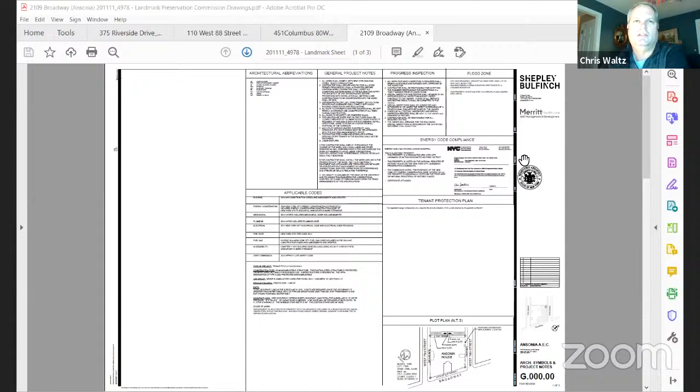The only modification we're making to the exterior of the building is the entrance to our suite. It's an existing door, a French door. It probably shows up on the next slide - you can see it in the bottom middle. That's the existing door.

The problem with our door for the new project is that it doesn't meet accessibility requirements. The leaves are currently about 31.5 inches, so when open there's just under 30 inches of clear space. We need 32 inches clear to meet accessibility requirements.

So we're proposing to remove the existing doors and replace them. They're wood-framed French doors with single pane glazing, which I'm sure you're all familiar with. We're proposing to replace these with Hope's windows and doors - you're probably familiar with them from Jamestown, New York. They're pretty much the go-to for historic preservation for windows and doors, and they're steel framed with insulated, double pane glass.

We're proposing essentially the same orientation - you can see it in the middle on the right. If you zoom in, you can see one of the leaves is a little larger than the other, about 1 inch larger, so that when open we have 32 inches clear. We also needed to eliminate one row of panes in order to put in the horizontal crash bars for the interior, but otherwise we've tried to maintain the look that's there as best we could.

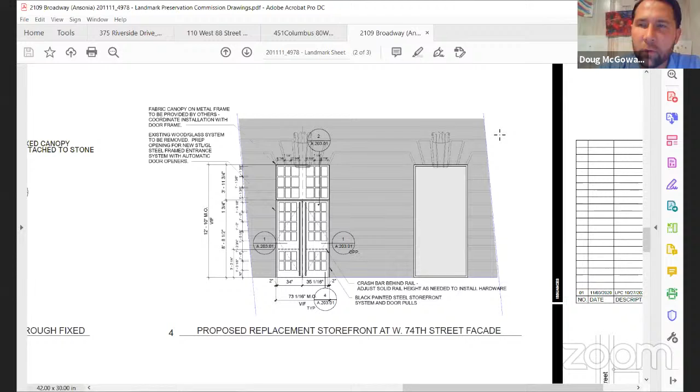Question on the door - is there also a proposal to put a banister or handrail down the center of that door? Yes, it shows up here as well - those are vertical poles in the center of the door. That's a door pull, right, not a handrail? Right, that's a pull. And the inside has a crash bar, and we also have an automatic operator being put in the floor to operate that.

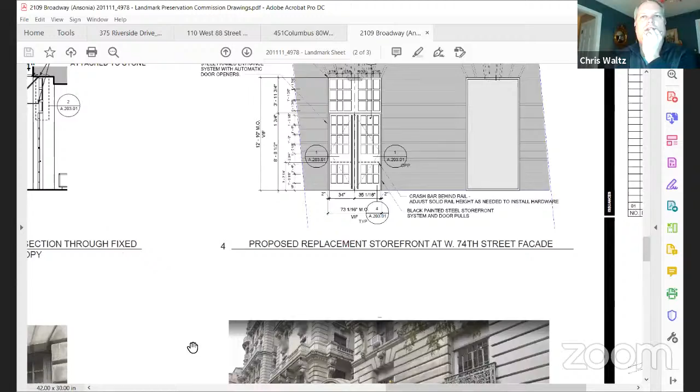If I may, it looks like here on the transom you've got some sort of divider - it's not a complete replication of what was there before. There is a central panel there, basically a large mullion. If you pull over to the left a little, you can see the center is a little wider due to the way it's framed in the transom. Ours is a little wider, and we're trying to line up the glazing from the windows in the transom to the windows in the doors. Because the doors are slightly offset, we felt this arrangement worked best, and we end up with that larger mullion in the middle.

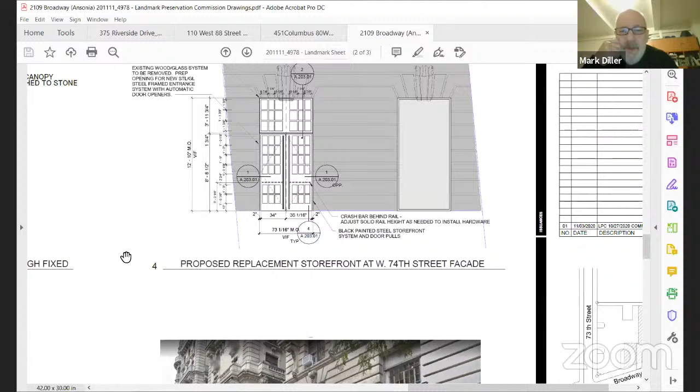Is the mullion in the middle of the transom the same width as the interior frame for each door? Because it looks like this element and the width of this element are the same - is that what you're going for? They don't line up directly. Of course not. So we tried to approximate it, and I'm not sure, Mark, if that was a construction issue from the manufacturer or a design issue.

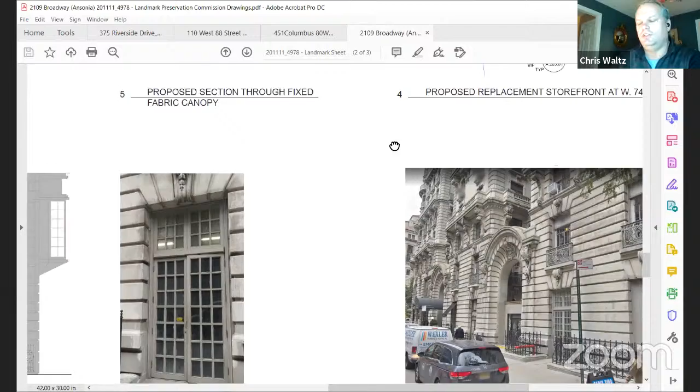In working through the drawings with Hope's, they indicated they need a certain width for the structural integrity of the frame. So if I understand correctly, there's about an inch, give or take a sixteenth, difference in width between the two panels of the doors. Is this dead center, or does it follow the line of where these door pulls line up?

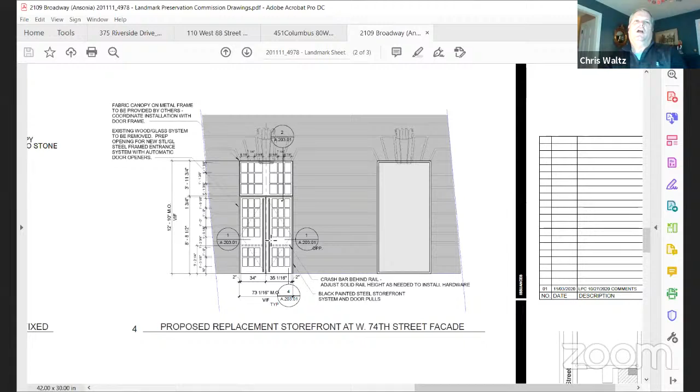Mark, can you comment on that? One of the doors is slightly larger than the other, and the width of the upper mullion is made a little wider for both structural reasons and to capture that discrepancy in the width of the lower two doors. It looks like this is dead center, and I'm wondering whether that'll look odd with the transom divided evenly in half above, but the doors below offset by a couple inches. I don't know whether that reads visually - it's hard to tell from the drawing. The way it's dimensioned, the top is equal and the bottom is offset. Our feeling was the offset is only a hair over an inch, and with everything going on there - the divided lights, the poles, and the canopy - it'll be negligible.

From a front view looking at it straight on, it's one thing, but you really never see it dead straight on all the time - you're seeing it walking up from either side. So we think that'll be a wash from a visual standpoint.

And will the color be the same? I have a question - did you do that because you're not making changes to the upper portion, or is the upper portion being changed like the doors? The upper portion is being changed to the same material and the same manufacturer as the doors.

I think the reasoning behind it was just to try to keep it to reflect the symmetry in the space, and trying to sort of hide it in the doors, because it's going to get lost in the thickness of that center mullion. That was the thought process.

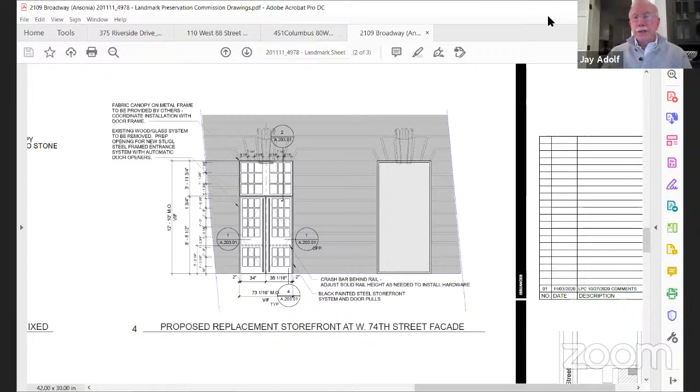I have a question, two questions actually. The other entrance doors on the other facades, are they still wooden doors?

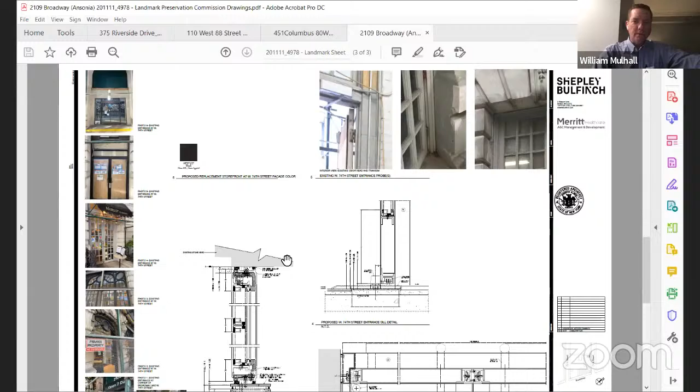We actually submitted some pictures of other ones, I'm not sure if they got into this submission. Can you zoom out? Was there one more page? I believe the only ones remaining that are wood are the actual entrance into the Ansonia residential component. I think the dry cleaners next door is metal, as well as the patisserie. No, I think that one's wood. Yeah, the patisserie is wood.

On the left side, those are some examples of the adjacent storefronts that have been added in. So we've got the very traditional storefront, the first two there. That's the existing, which matches what we have now. And that one's still wood. Yes, it is. I actually go there. That it definitely is.

So what's the rationale behind not replacing the current wood door with a wood door that meets the ADA specification? I think a lot of it is more the practical side, durability, security, strength, those types of things. These doors are extremely tall, and we feel that over time there's going to be a lot of traffic, so we felt steel would be a better functional solution to this.

You mentioned the automatic door opener, is that on the inside? It's recessed into the floor slab, so you won't see it. It'll look just like a threshold. I see, okay.

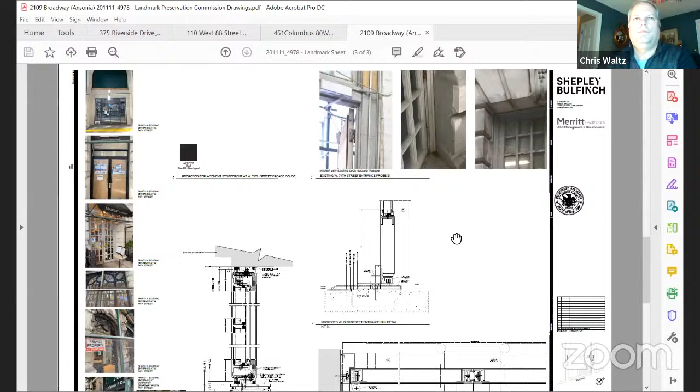And thank you for having that. I thought that sheet wasn't in there for some reason. Thank yourself, because I got it from you. I knew we had it. I thought we sent you a different version. So were there any more questions?

If you have more questions on the doors themselves, you can see in this image on the right, near that image, the canopy we're proposing. The intention is to match as closely as possible the adjacent one at the patisserie for color, size, and location.

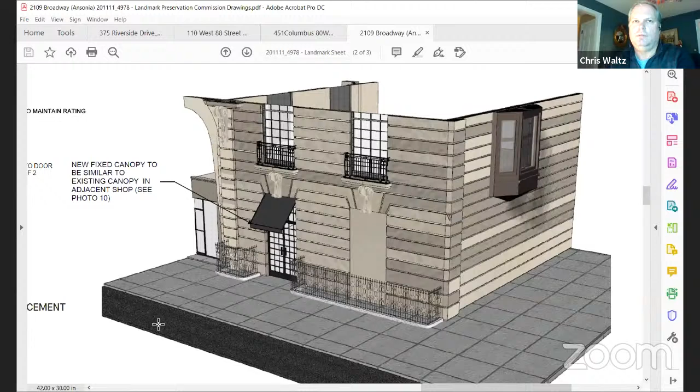Material? It's a fabric material. Both. The patisserie is also fabric. Yes, I believe the patisserie is fabric. I don't believe we specified this.

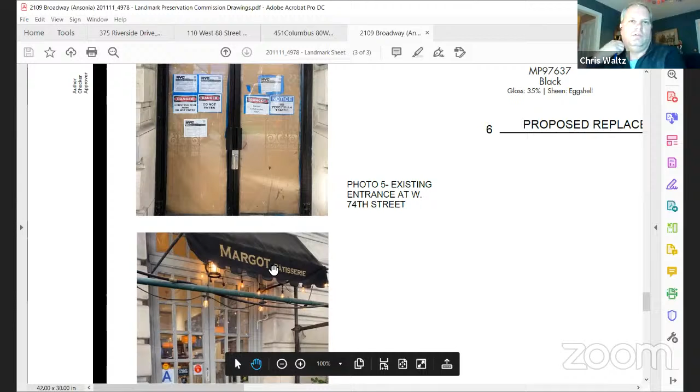Okay, will there be writing on it? Very similar to what is on the one at the patisserie. Yep.

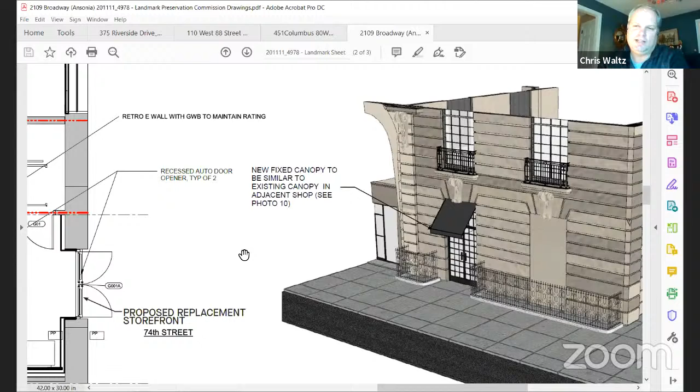Can you explain something about the different colors? There's the white and then there's a black door as well? Well, the white is really, so where the canopy is, that's our door, and the white is really representing the glass. It's just the way that it rendered in this image. No, I don't mean this.

I mean in the earlier one, the other storefront that is not being changed. Oh, at the patisserie. Yeah, so they have kind of a grayish tone to theirs. We have black, and the black was intended really to match some of the interior elements as well as the fencing running around the outside. Oh, so your door will be black? It will be black.

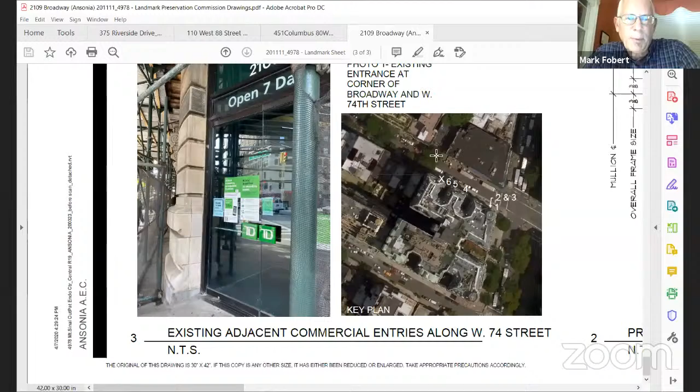Is that scrollable? If you scroll out, you can see there are other storefronts - that one in photo number 3 is also black. And if you scroll down, there's another one that's also black. Most of the storefronts existing there now are black.

The cafe is the only one with gray. Yeah, but the gray is the original, isn't it? It looks like the windows above are greenish. Because I would completely rule out the Philistines who designed this one, for example. They don't get a vote.

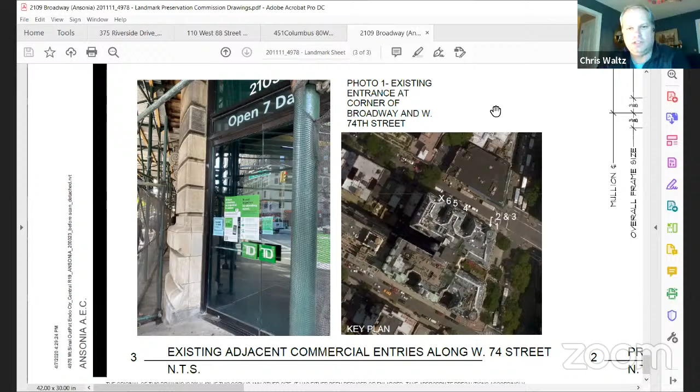I think that's fair - sorry if that's you guys, by the way, but I'm guessing it's not. No, probably not. Is the existing black? No, the existing is gray.

I don't remember what the windows above are, to be honest with you. Yeah, it's exactly like that one right there, the existing one. Got it, right. All right, I'm going to stop share for a second.

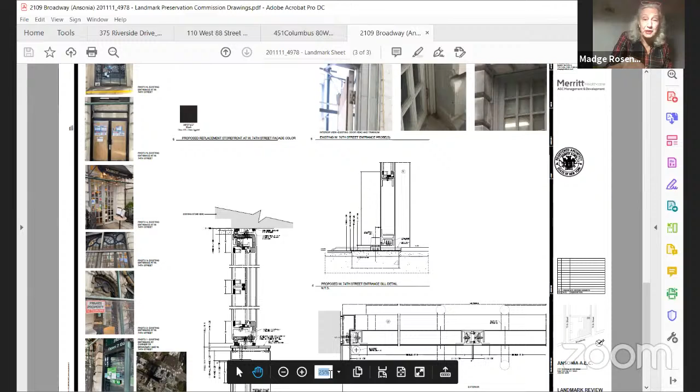They're in terrible condition, and I'm wondering if any of those doors are part of your project. No, they're not. It's just this one entrance that goes into a little small waiting area about 500 square feet, and you take an elevator down 2 floors, and that's where the space is. So this is the only piece.

Is there anything to preclude the color similar to the Cafe Margot, so that they don't look so metal? They might look a little less different and less metallic if they were black.

That was a choice we made. I suppose that's an option we could consider. I think there's an availability in that color, if that's what you're asking. Yes, thank you.

I did a quick look for the existing color of the windows above, and I saw this picture, which seems to suggest that the windows above are a darker color. Yes, it does. I don't know if that's useful, but quite beautiful. Okay, we'll put the other screen back up again.

Can you remind us the reasoning behind increasing the size of each door by a half inch, or decreasing the glass panels? The existing doors are equal, but that's always a problem with French doors. They're the same size, but neither meets accessibility requirements, so in order to maintain the look of French doors, we had to make one a little bit larger, by about 1 1/16 inches, just over an inch, to make it the correct accessible width. Another option would have been a single door in some kind of infill, or a single door 5 feet wide spanning the whole thing, or sliders. But we felt this was the most authentic and paid the most respect to the existing building.

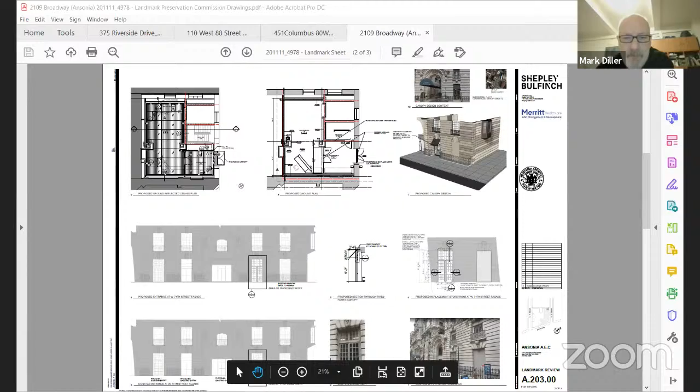I don't know if it's of use, so I'll make this quick. Looking at this slide, I'll enlarge it a little bit. Just confirm for me that I'm reading this correctly, that this is the existing facade. Over here is the TD Bank. This is Cafe Margot, this is the dry cleaner. This is actually a recess into an areaway that has a built-out entrance with a very modern 1970s aluminum door frame. And then this is your space. Do I have that all correct?

I believe that's right. This is the dry cleaner here. And this is that blank metal thing. Yeah, that's correct, it's an infill. Which unfortunately is right on the same plane as the stone around it.

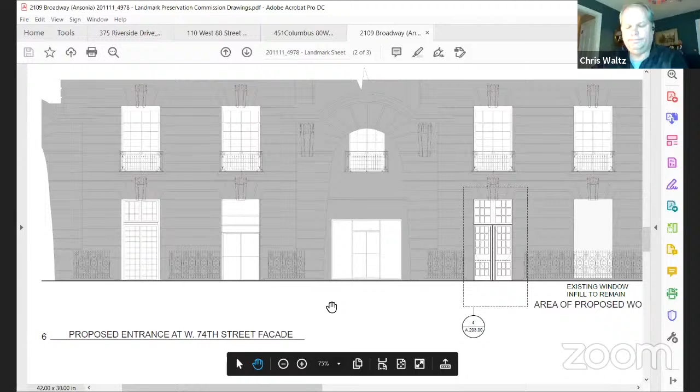Any other comments, thoughts, questions? Yeah, I have a comment. I kind of feel about this the way I felt about the vault lights at the Apthorpe, but given the fact that it's going to be changed, all things being equal, without a compelling reason such as impossibility, I would prefer, and I think it's appropriate, to replace these doors with wooden doors in a color similar to the patisserie. To that gray? Yeah, that's my opinion. No, I can't agree with that. I think because there's one bad apple in there, the other one shouldn't join it. I think to change the patisserie is more the goal, if possible, but that's not before us. So I would go with the doors as they're being proposed, and hope.

Why is the patisserie a bad apple? Well, the patisserie has got this very whitish color for the doors and windows, and all the other window frames and door frames are black. Is the patisserie the original door? Is that not right? I don't know that we know that one way or the other. It's certainly been there a long time, but whether it's original, no one has opined.

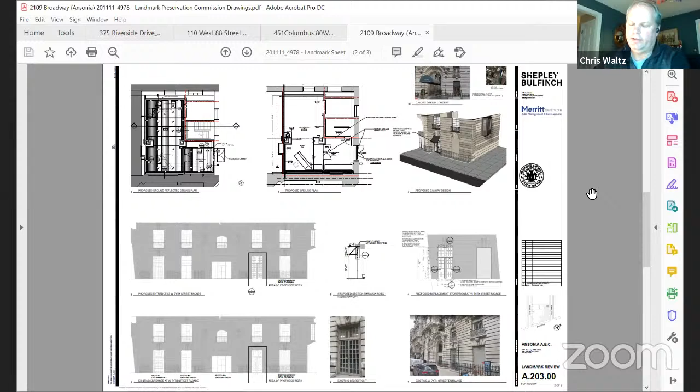If I could ask a question of the architects, would a change to wood from metal have an effect on the functionality of the doors vis-a-vis their ADA compliance, or is that just a choice that can be made one way or the other? I think we'd have to look into that, because we have the auto operator on there for people who need to use it, and I don't know if a wood door would have the rigidity needed for the auto operator to function. I'd also have concerns for the owner about longevity, replacement, and upkeep, because with wood you'd be painting it extremely often, much more so than metal.

And also, we're required to meet the energy code. The steel doors, the storefront, is thermally broken, so it's made to meet the current energy codes as well, with the insulated glasses.

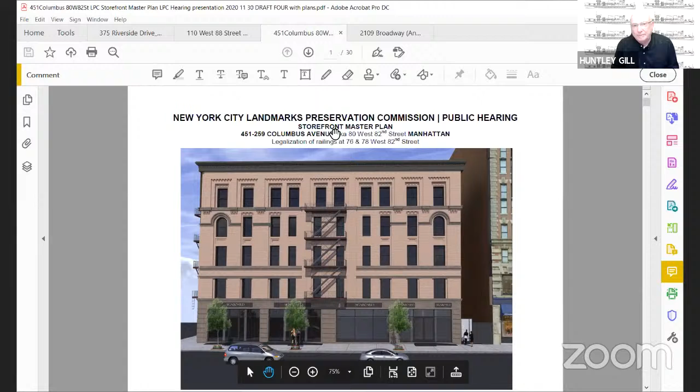This is a building between 81st and 82nd Street. You see the location here, it wraps around the corner. It's 3 tenement houses. One is the north half of the block on Columbus between 81st and 82nd. The other 2 houses march down West 82nd Street. So we can go to the next one.

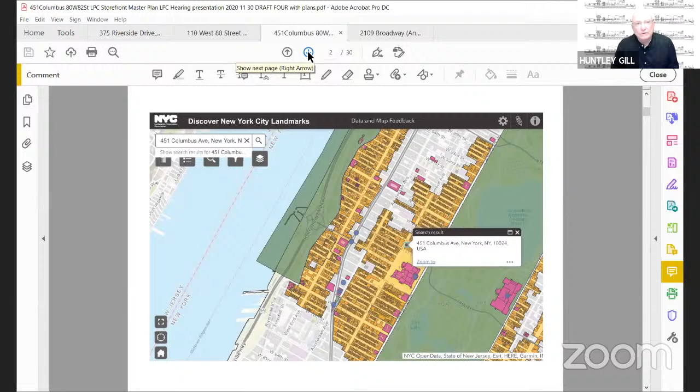That's a separate staff approval of brownstone restoration. Unfortunately, at this point the client is probably going to paint it, which I don't like, but I'm not in control of that. There are also 2 sets of railings on the stoops at 78 and 76.

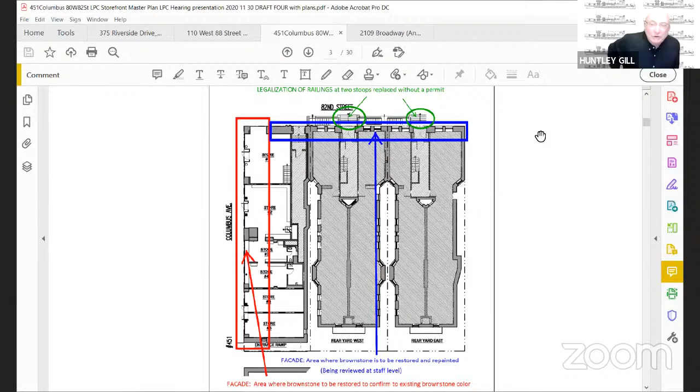We'll look at pictures of those. They were replaced without a permit, and that happened because they were very low. My client tells me he didn't know about this, didn't even notice it. They were very low, perhaps 18 inches, and one night somebody, probably in his cups, tumbled into the area way below. So they were quickly replaced. We'll take a look at those. We can go to the next.

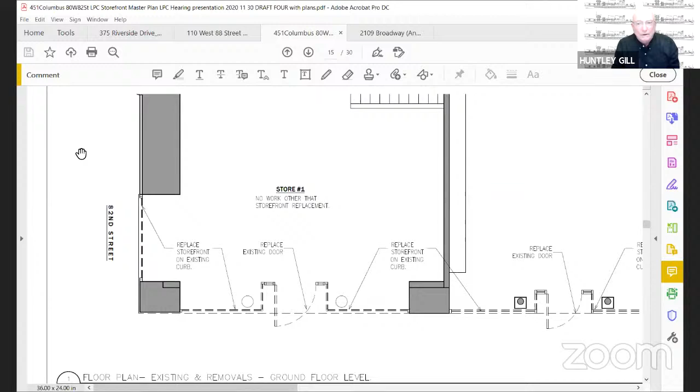You'll have to zoom out here. This is the demolition. You can see how the existing storefronts are set right up to the front plane of the building. If you scroll down, they're being inset back to their original location, which is slightly inset. All of the doors are in-swings. The spaces are luckily small enough that we can do that, so you don't have to have any insets for the doors. They can all be flush, which is much preferred in retail.

We're providing here in store number 3, which is actually part of the linen store, for the fact that if it's ever turned into 2 stores, we could put a door back in there. We won't be in the meantime, although he's struggling, so who knows what's going to happen with that.

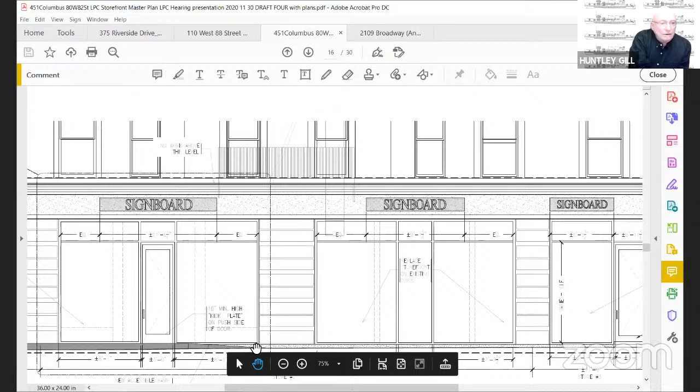Could you scroll down just a little bit? I want to see if there's any details on the ramps. Do you have this up on your screen? Would it be easier if I just let you put it up yourself? If you'd prefer, sure, I can do that. Let's do that because this isn't working so great.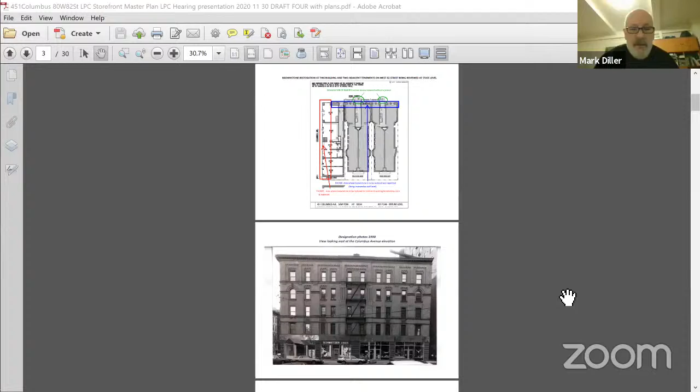So hold on one second, you should now have the ability to share your screen. Sorry. Does this do it for you? Right now I'm not seeing your screen, but maybe it's just taking a second. If not, I'll go back and continue where I was. It's up on my screen, so I don't know what. There should be a green button at the bottom of your screen that says Share Screen. Hold on one second. I'm seeing, oh here we are. There we go. Great, okay, now you've got the controls. Sorry, this is taking so long.

You're doing great. You can see in the plans here these are the ramps, really without railings. They're ramps and steps, so it's a minimal intervention. We made them as small as we can. We hope that's a temporary thing, and we don't know if any of these stores will choose to put them in, but we wanted to put it in the application anyway.

Here again is the elevation. You can see that what we're planning is to put this brownstone element that continues, replicating from 82nd Street, this small cornice, continuing all the way across. Then we'd put aluminum signboards in the space above each store. Retailers love signs — sometimes I'm not sure why they think they need them so much — but the signboards would match the color of the cornice above.

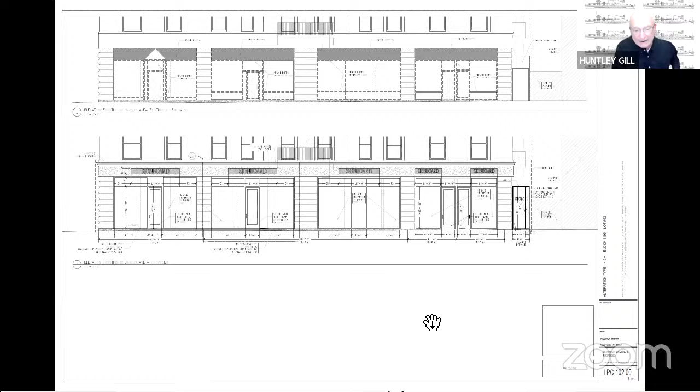This is turning the corner. You can see we'd be replacing this one light here on 82nd Street. Then this is where the line would go between the restoration of the brownstone as brownstone, and, at least right now, brownstone restored as paint. If its occupancy rate goes up, we might talk him into changing that, but that's not going to happen soon anyway.

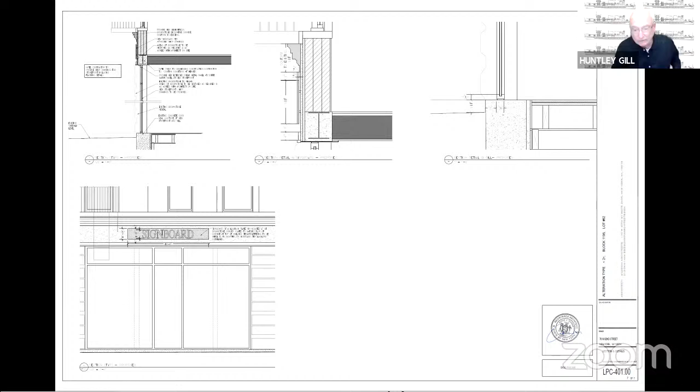Here are a couple of details. You can see the storefront being inset so we can get a view of the existing. There's a nice brownstone reveal here that goes into the storefronts. As we replace the storefronts, we'll take out any gypsum board or whatever is on the inside so you could actually read that all the way through.

Here's a rendering — again, the signboards would match the color of the cornice. The storefronts are aluminum, very simple, flat black, powder coated. We'll also be replacing a rather ugly metal gate here that goes down to a rear yard where there's a storage tenant, so it's used. We'll replace that with a simple glass door that matches the existing storefront doors, in frosted glass. Another rendering — there's a signboard missing here, there'd be another matching signboard there. And you can see here the handicap ramps.

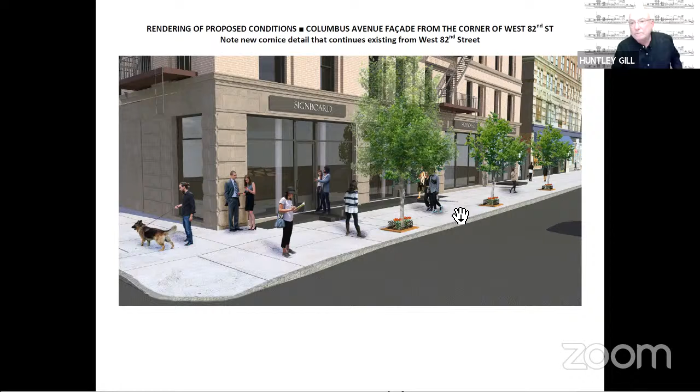Another rendering here, you can see this. It's not drawn correctly - it actually aligns here. It's drawn correctly in the drawings, but the rendering wasn't updated, so this aligns here with this mullion.

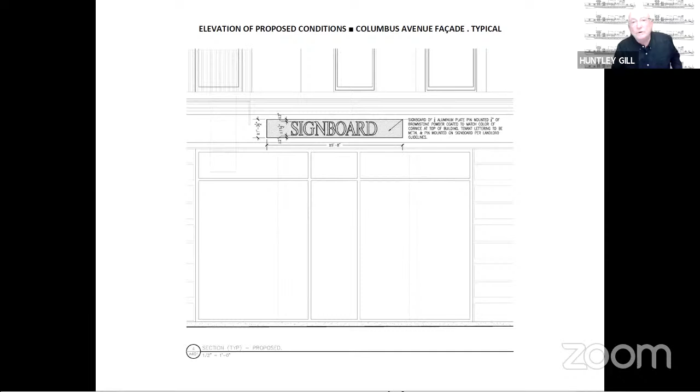A detail - this is of the center store. A few more details, you can see here's this photo here. There's that nice kind of brownstone reveal tucking back into the brick, which is what we want people to see again.

Here's some others. We're doing full height glass, which is what you need these days in retail - God knows Columbus Avenue needs everything it can get. A lot of these storefronts have been approved by the commission that are full height and with in-swing doors. These are just some examples going up and down the avenue. I'm sure you're all familiar with them.

Our philosophy is, and it has been since we advocated for the creation of the historic district on the Upper West Side strongly over the opposition of a lot of our clients - our position has always been, as at Madison Avenue, that the thing we want to preserve very carefully is the frames of these storefronts, which tend to be of historic material, but that the storefronts themselves were always relatively fungible. They were wood, they died, they were replaced, they were changed with tenants. And modern retailing really smiles upon having glass go down to the curb so you can actually see what's being sold more than any sort of storefront.

This is going on to the legalization, which is these are the darling little railings that were unfortunately replaced after a dramatic tumble, as I said earlier. And there were choices. This is what the client put in, and I sort of didn't even notice they'd been replaced. They wouldn't be my choice, but I find them rather inoffensive. The staff at Landmarks thinks they're rather inoffensive too.

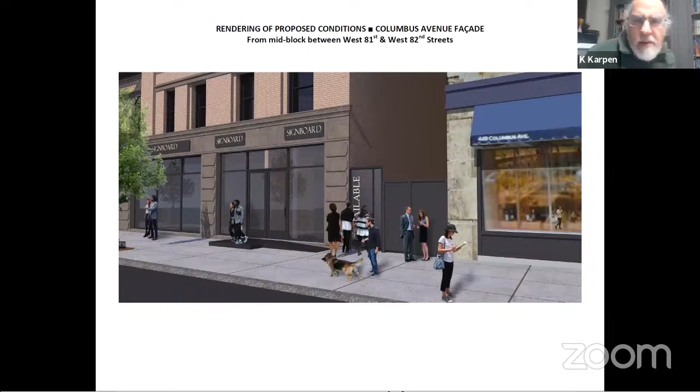So before us, for our input, is the legalization of the railings, and what other element? The legalization of the railings is the only thing that's going, other than the master plan for the storefront, going before the commission.

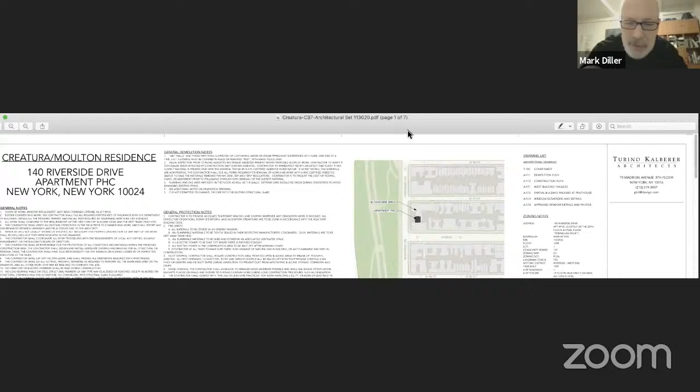Could you explain to us how to share? Sure, look at the bottom. If you move your cursor to the bottom of your screen, you should see a green button that says share screen. And then that should activate a window that'll show everything, including pictures of the grandkids, that is up on your computer. Yeah, you got it. There you go. Okay, great. Beautiful, you're all set.

So I'm just trying, how do I get to the next page when I have to go? Either try, are you on a Mac or a PC? I'm on a Mac. All right, then try the right arrow. Oh, I see, arrow. Now hold on, if I just scroll, that'll work too, right? It will, but you'll have to align each time, but go ahead. There you go. All right.

I'm really sorry everybody, I thought we were all set with this. No worries. All right, what is your name?

My name is Julie Kalberer, and my colleague here is Bill Turino. Can you spell your name for me? Kalberer, K-A-L, B as in boy, E-R.

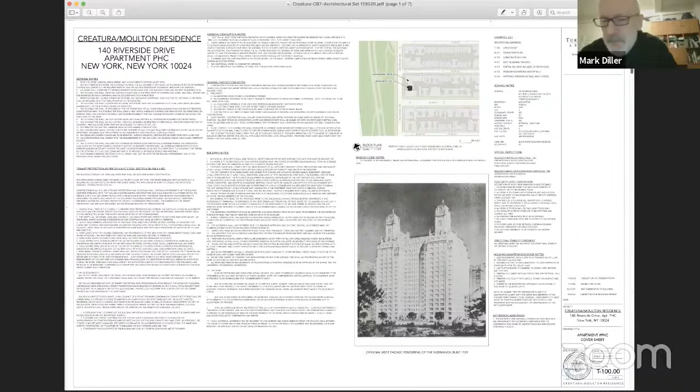Thank you. Do we need to promote Phil in order to hear? All right, well why don't you go ahead, and if you need Phil's help he'll just sit here with me. Oh, he's there in the same room? Perfect, okay, all right, I'll shut up.

All right, so showing you the first page here. This is a rendering of the building. This is the Normandy on 86th Street, between 86 and 87. It's an individual landmark, a 1939 Emery Roth building. We are doing an apartment renovation on the top floor, in the area between the two towers facing Riverside Drive. And it became clear to us, and I will go through these drawings and show you, that changes had been made on that top floor that were then captured in the window master plan of 1992 for landmarks, that actually make it look now like it's an unfinished elevation, and that we might have an opportunity to combine windows, which is obviously better for my client, but also better for the look of the building.

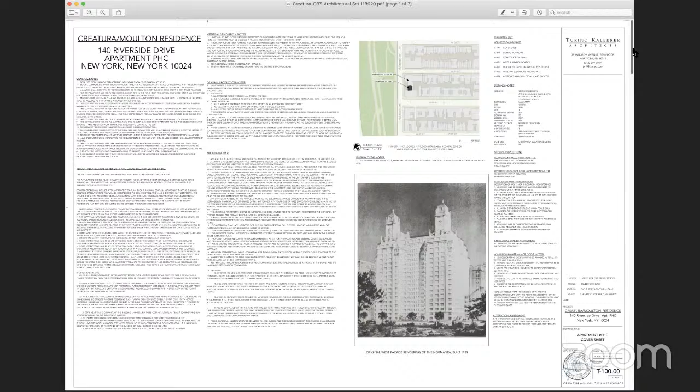So I'll take you through it here. This was the original rendering. You can see that very top floor in between the two towers is the one we're looking at. I'm going to skip through the plans and go right to this sheet here. The left-hand drawing is the existing condition, what it looks like today. If you look at that very top floor again, in between the two towers, you can see it's a mishmash of windows in terms of opening sizes. There's a combination of wide windows, very typical for the Normandy, but also smaller windows, which was typical up at this level originally.

Now, what happened was that sometime before the 1992 plan, on the far left on that upper level, the two large windows in a neighbor's apartment were combined. So what originally was a series of singular casement windows with an occasional wider window became off-balance, because you have these larger openings on the left, and our windows are the smaller ones on the right. On the next sheet, the right-hand drawing is what we are proposing, including using the master plan for the windows, so you can see at that top level what the neighbors will have to do when they make their changes.

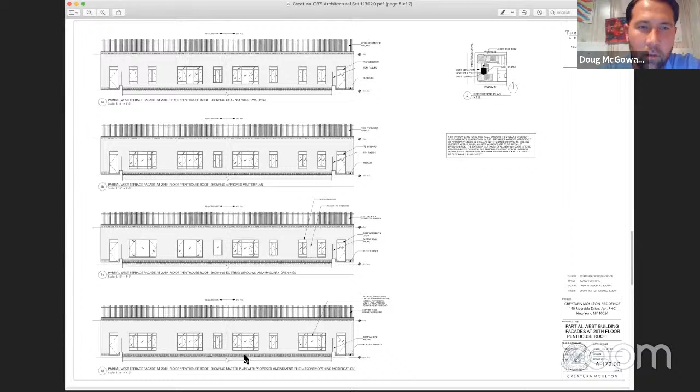You mind if I ask one quick question for clarification? Sure. We're talking about the windows at the right of the rendering. If you go all the way to the bottom, and look at the last rendering we're focused on, then move to the left, it appears the two windows all the way at the left are also changed in this rendering. Yes, the very last one shows the new opening we're proposing, but it's also showing what the master plan has planned for the left-hand ones. This would be the eventual goal, to get this whole elevation this way. Of course, that's not in our application.

Beautiful. All right. Questions from the committee or others?

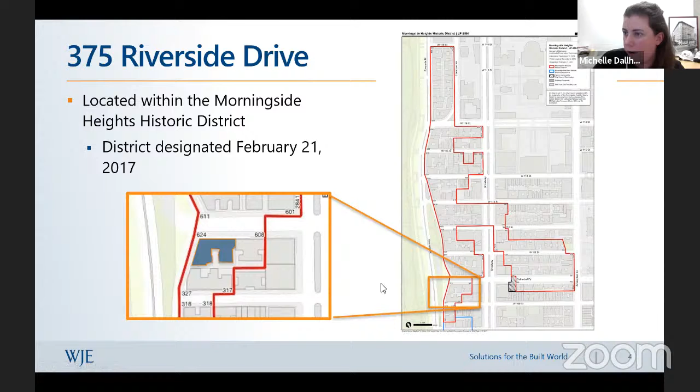Here, 110th Street. I'm sorry, just remind me, it's on the south side of 110th Street? It is on the south side, yes. Okay, that's us. Okay, yes it is. Oh yes, it's just at the edge of the community district. Yeah, I noticed that this morning. You just got us, yes. We just got you, all right.

So it is a tan brick building with some terracotta detailing. It is a Renaissance revival, but overall the facade is very subtle and very muted.

Here's the 1940s tax photo. Generally, the facade has remained very intact with very minor modifications. The one thing is, though, that the original windows were 6/1 and sometimes 4/1 in these paired windows, which I'll discuss more later. I'm not sure if you can see my cursor. The original windows do have very narrow frames and very small muntins from what we can tell, but we don't have a lot of information or historic photos beyond this. Come the 1980s tax photo, you can see that almost all of the divided light configurations have been lost. So here's a close-up view, and this is very consistent with what is in place now at the facade.

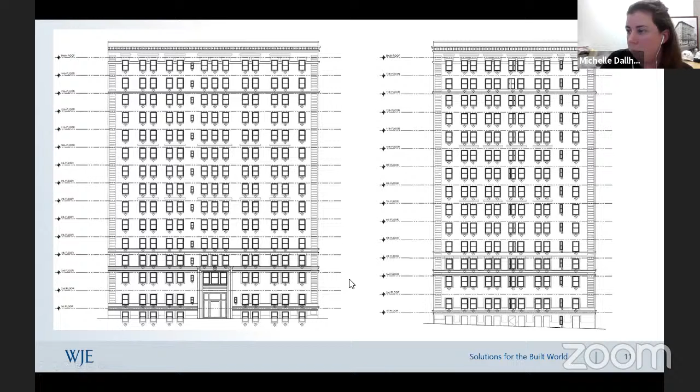Here is the currently proposed elevations for the street facades. This would be the north elevation at 110th and the west elevation at Riverside Drive, introducing double hung 1/1s throughout. The off-street elevations are also very consistent. No historic fabric remains other than some wood frames and wood perimeter jamb conditions, but a lot of the existing mullions have also been modified.

Here are the proposed elevations, also proposing 1/1 double hung aluminums throughout the off-street facades.

Although most of the windows are single units in punched openings, there are two types of paired windows. There are generally proportionate paired windows at the off streets, but on the Riverside Drive facade there is a pairing we've referred to as the maid's room pairing. I believe this was a service space with an accompanying bathroom. So there is one line on Riverside Drive that has this unique, unusual pairing with a very, very slender window, about 12 inches, and sometimes that's ambitious depending on the existing panning conditions. We're maintaining these throughout the proposal, but they are to be noted as one of those more unique configurations.

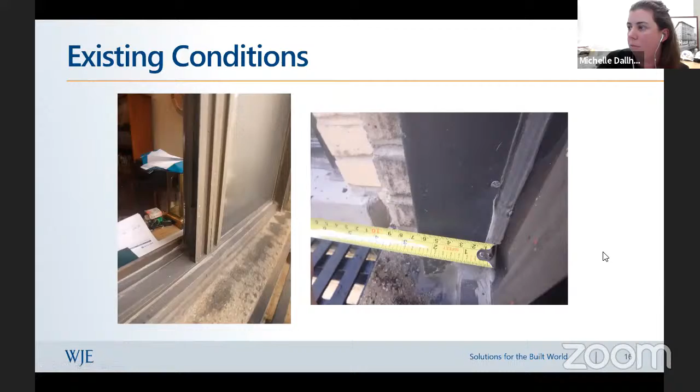What's your proposal? My proposal is aluminum 1/1 windows throughout in lieu of this historic divided light over one. And my question is about the framing that you just showed us. Are you going to change that or unify that in any way? Oh, well, I can skip ahead if you'd like. Don't skip ahead. No, I just thought that I was asking about what you just showed us.

So some of the existing configurations have shown a window-to-window frame and have lost the proportions and the volume and the detailing of the central mullion, and I'd like to reintroduce those.

So here are the typical elevations of the single window units, mostly bathroom and kitchen for the small, and living, dining for the street facades. They're very proportionate, this A-type unit. We're proposing going from the divided light historic windows, and the current inconsistent aluminum frames with varying jamb, head, and sill conditions, to a more unified elevation with adjusted sight lines and more consistent jamb depths.

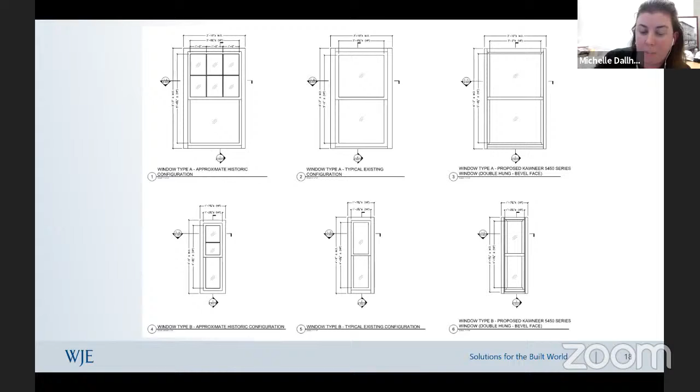And are there any of the existing historic 6/1s or 4/1s left? No, none. There are very few areas where I could see the original wood molding at jamb conditions, at off streets, at basement levels, but very few and far between and in poor condition.

If I can skip back, I don't know how to go back. This is where we were able to observe some of the original detailing, which is very subtle, much like the facade, but there was a fine bead detail that I've reintroduced. We were also able to document the width of the historic mullions to reintroduce that, a 6-inch width, which would be more consistent.

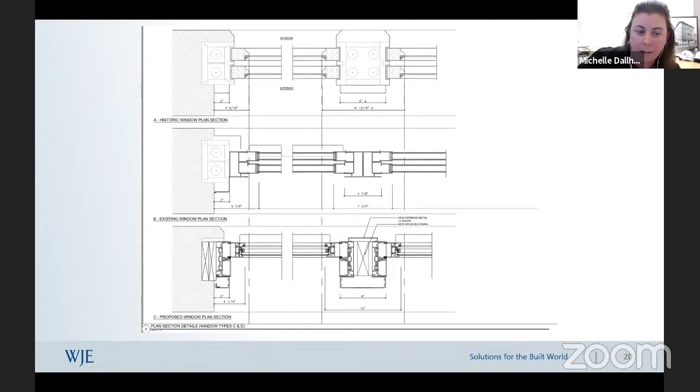So these elevations show those configurations, both the maid's room configurations with the slender window to one side, and the proportionate paired window elevations. This section shows the typical detailing through any of the paired scenarios where we will be going brick to brick. In some places, the windows will already have lost the historic fabric, but this will be the universal approach, in the interest of having appropriate waterproofing details, air sealing, and energy efficiency of the new units, and to recreate these consistent sight lines and molding depths.

I just want to be clear. So you did say, in response to Kay's question, that there are no 6/1s left on the building, is that correct? Correct. I think even in the 1980s tax photo, I could only identify a handful of them. So I think they've been gone for quite some time. Can you bring up, again, just a picture of the building? Yes, current or historic? A current photo or a historic one? A current photo.

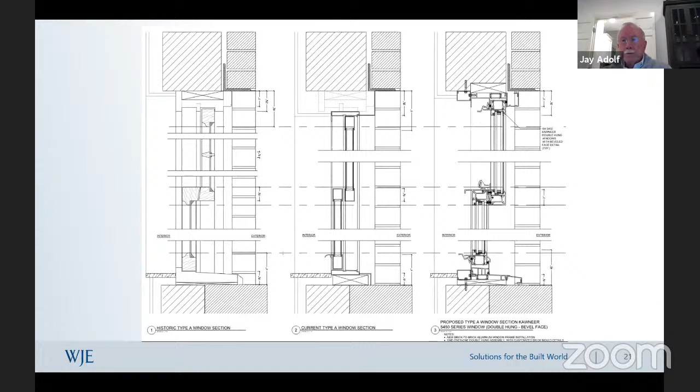I asked for that because if I may, Kay, can we comment? We've generally had two criteria for approving master plans which are not historically accurate: one is where the vast majority, and certainly in this case none, of the originally configured windows are left. The other—someone correct me if I'm wrong—is one of the standards Landmarks uses: whether the configuration of the windows is a major, if not the major, aesthetic element in a building, as opposed to stonework and so forth. That's why I asked for a current picture of the building, because other than the windows it looks

pretty plain. If I'm not mistaken, please correct me, there don't seem to be any. No, yeah, it's certainly a very subtle and restrained building.

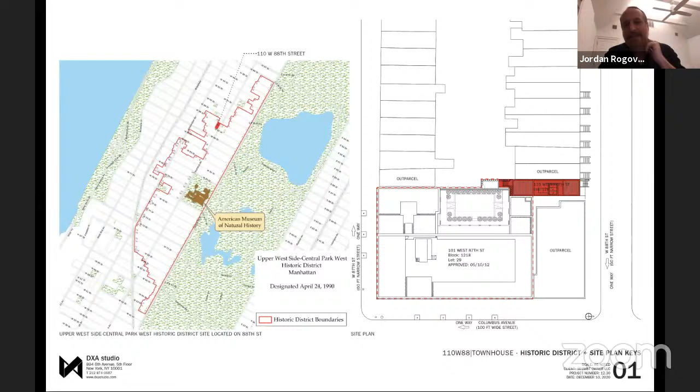Well, first of all, I would like to thank you for hearing us tonight, we really appreciate it. I know we were relatively last minute in reaching out. And if this seems like deja vu to everybody, it is deja vu all over again. We were before you about 7 years ago with this project, and yes, it remains a conceptual project at this point, but the owner has every intention of building this, and that's part of the reason we're back here today. After we presented to you, there were a number of comments made at that time, some 7 years ago, and we made a number of those changes, which we'll elaborate on through the presentation tonight. And ultimately got an approval from the Landmarks Preservation Commission in March of the following year, 2014. So we'll get into that shortly. But thanks again for hearing us tonight.

So starting with this first slide, this is the site in red. Can you see my cursor? Is that visible? Yes. Excellent, thank you. So we're right on the northern edge of the Upper West Side Central Park West Historic District, right at the corner or near the corner of 88th and Columbus.

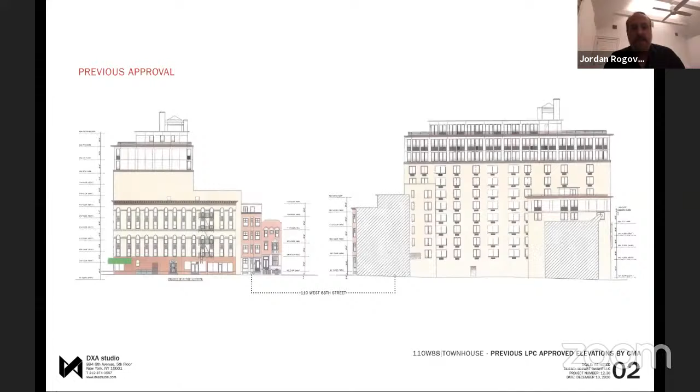On the right-hand side of this slide, you'll see that this lot is kind of the tail to a much larger lot, which is 101 West 87th Street, a large condo building. On the next slide, you'll see that project was approved initially with a townhouse design at Landmarks prior to our involvement back in 2012. So that townhouse was part of the same zoning lot of the large condo building, the 101 building, and actually throughout construction served as an access point for the construction and staging. So it was going to be the last thing built even at the inception of the project, and unfortunately to date it hasn't happened, but we hope to realize it in the near future. We just wanted to make it clear that it's part of the same zoning lot, and the rear yard of this townhouse is actually the courtyard of the condo building, so they kind of function as one zoning lot.

Here are renderings of what was approved at Landmarks for the condo building, 101 West 87th, and on the right-hand side, what was approved initially at 110 West 88th Street.

Going back in time here, 1940 tax photos, you'll see that 110 was really one of 8 really fantastic eclectic row houses designed by Samuel Reed, initially built in 1886, Romanesque revival style, peppered with all manner of different styles and pieces throughout, which we spent a lot of time analyzing. On the right-hand side here, we have the tax photo actually showing the remnants of the demolition of the original 110 Samuel Reed building in 1988, so you can see the debris being hauled away when the tax photo was taken. So the lot, to the best of our knowledge, has been vacant since that point.

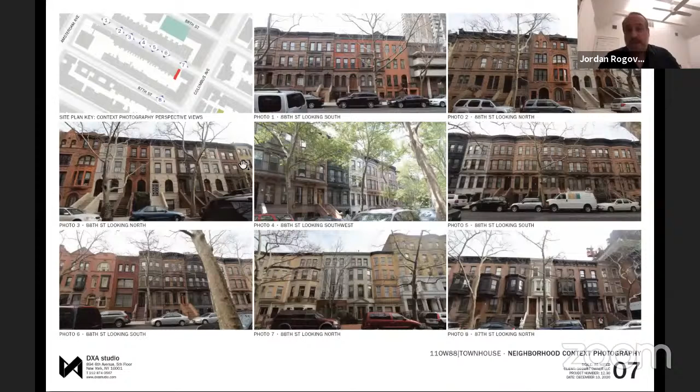As we looked around for design inspiration, what we felt would be contextually appropriate for the site, we went up and down West 88th and throughout the neighborhood. And what's immediately apparent, something you know inside out from dealing with this district regularly, is the amazing texture and fabric of the row houses and the great rhythm.

And what we saw immediately was a balance of unity, or unifying features, along with diversifying features. Some of the diversifying features are ones of color or painted brownstone. There's a number of different bay windows and elements that tend to diversify and individualize each one of the units. So that was something that jumped out at us immediately.

One of the other elements we looked at was the transition that happens from mid-block to the avenues, where there's a shift in scale, massing, and articulation. Us being the easternmost, right up against Columbus Avenue, the large building at Columbus Avenue which is 570 Columbus, we looked at this condition: what happens in this transition between mid-block and end-block?

We looked at the singular material or materiality of a lot of these row houses, how so many different things are articulated with the singular material, and thought that's a beautiful launching-off point for thinking about materiality for the project. Bay windows are another predominant feature across all the facades, and that very frequently becomes one of those diversifying features.

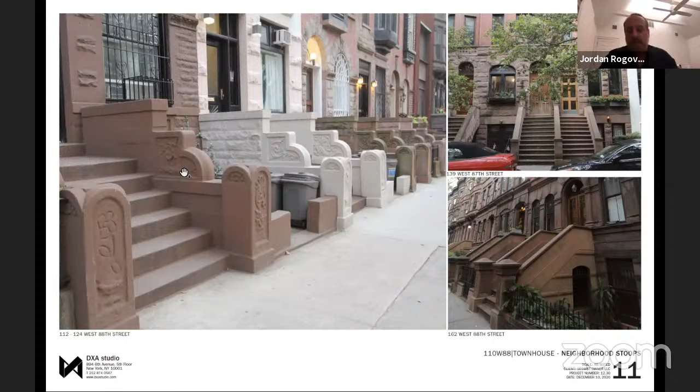On these townhouses, and then of course stoops, and the idea of a transition from the sidewalk into the home, creating again a transition and a procession into each one of these townhouses. So we knew when we brought this back, to do so without a stoop would be a mistake.

So in understanding this diversity versus unification, we tried to be very scientific and analytic about it, and look at what looks like a hodgepodge of all these different elements across the facade is actually a very finely calibrated balance of features.

Beautiful pediments that really break down to one of three types, and then a kind of rusticated Mannerist-type base at the bottom, and then the belt coursing, which is continuous, establishing datums where all the windows align, and all the windows are the same width-wise horizontally, and then very different on a vertical axis.

And so here you go — this is starting to set the buildings apart from one another with the different window sizes, apertures, alignments. So there's a lot of play happening with those elements.

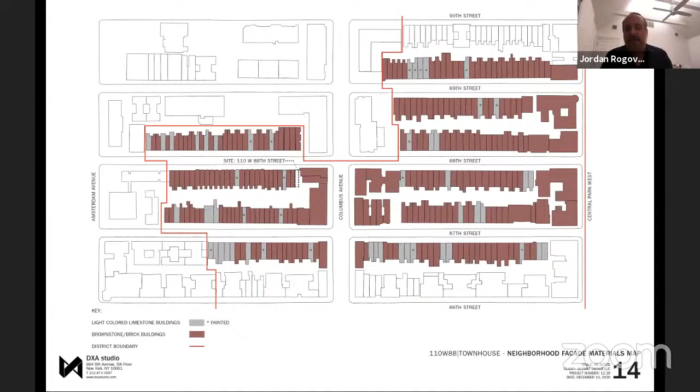And when it comes to the color of the facades, we found that throughout a good 15 to 20% of the buildings in this district were actually lighter colors, and they were creating that sense of diversity, differentiation, and individuality between all of those buildings.

So here's some examples, some of the light facades. Very frequently, they're painted brownstone or brick buildings.

And so here's the first representation of the design that was ultimately approved, and it's quite different than what we showed you back in late 2013.

I think one of the big issues CB7 had at that time was with the bay window — we had a projected bay window, and many felt it was lacking the charm of the other more articulated, more traditional bay windows. So in our conversations with LPC, and following your critique, we pushed the bay window back so it wasn't projecting, wasn't as monolithic, and was more coplanar with the facade and more about the framework around it.

Another feature that resonated well with you last time, and definitely with the Landmarks Preservation Commission, was that we acknowledged the punched window cadence across the Samuel Reed buildings was of critical importance. But we also know most buyers of property are looking for as much sunlight as possible, great views, and West 88th is no exception, having a beautiful, verdant streetscape with trees.

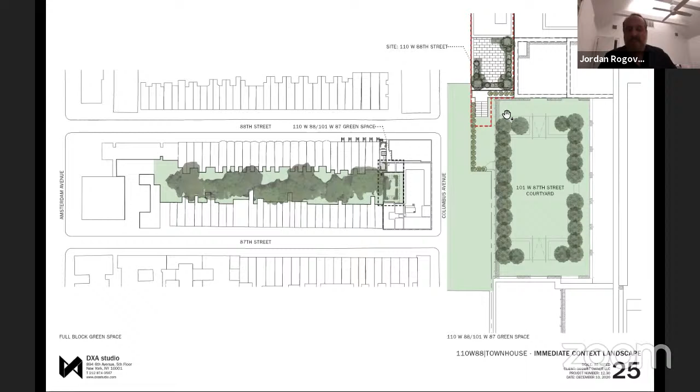This townhouse will effectively share the amenities and outdoor space of that development as part of being part of the zoning lot. Lester, can you speak to this slide? This is just showing the donut, right? Yeah, this is just the picture of the donut in the back there. Got it, okay.

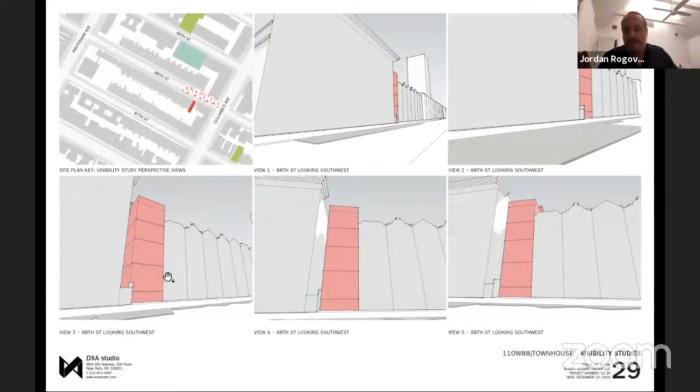I think, Lester, we're only about a third of the available FAR for the site, if I'm not mistaken. Yeah, it's 3.44, and we're at 1.5, I believe.

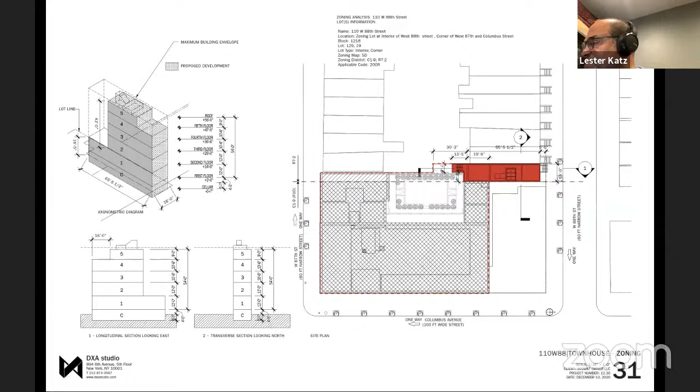Got it. Anyway, that's it. That's the presentation, and thank you again for allowing us to present tonight.

So can we get the history now? Are you here because your permit expired on the original approval? Yes. It was approved at LPC, and it expired in March of this year. We had been working with LPC to extend that, and we missed their deadlines by a matter of two or three weeks. There is an interested party in building this, and so our hope is that in extending this, that deal is culminated and the building is built in the near future.

Okay, I wanted to make sure our newer members understood the history, that this was approved at LPC and is now back in essentially the same iteration. Yes, that was approved with a couple of different details.

If I may follow on Jay with that? Do we lose Kay? Oh, no. Okay, well, then I'll grant myself permission to do that.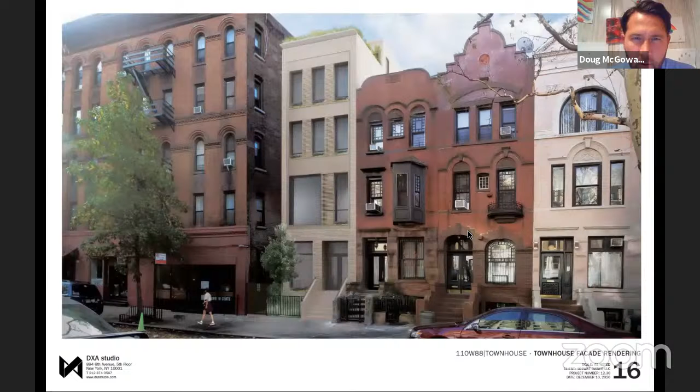No more pediment. And we came back with a cornice that again is contemporary, but it still has enough heft to cap off and serve as kind of the head of the building, with the base and body.

Can you show more of the facade of 88th Street, how it fits with the other brownstones to the west? Show the context photos that we have earlier. You could also bring up the elevation that shows the street elevation, right? I think this one's better because it shows the whole block.

So again, it doesn't look like these buildings per se, but it tries to capitalize on and utilize some of the design devices at play. When we looked at it, it's a balance of elements that try to make all of these buildings look the same—lining up the windows, the band coursing, the cornices, the base. Certain elements are repeated on all of them, and then there are elements that are different to set them apart: the color, different types of bay projections, different stoop articulation. So it's a balance of those two elements, and the composition is finding that balance. We did that, but more so in a modern vernacular where it appears a little bit simpler, but it's still trying to use these devices throughout. So it has the same DNA, but decidedly more of a reflection of how we build today, rather than doing a brownstone.

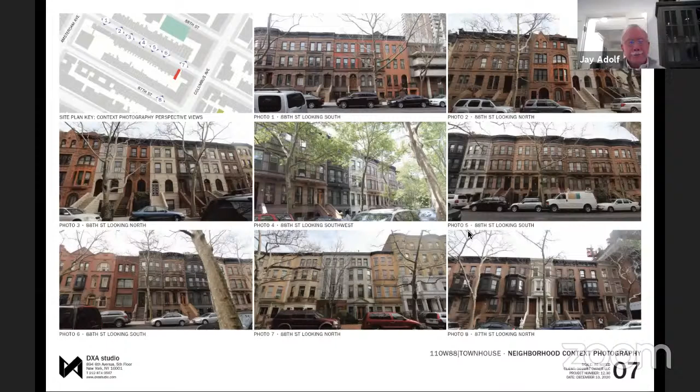You mentioned uniformity—you looked to build uniformity across some of the representations in front of us here on the screen and the proposal. Can you go back to the slide that notes the increase in height of the townhouse as it relates to their neighboring buildings? I think the rendering shows that, or maybe you're looking for one of these slides specifically.

So the uniformity really has to do primarily with the band coursing. You see there's a very strong datum here. One of the problems we had with the design that was approved before us, the brick one that I showed you in the beginning, is that there was zero regard for those levels.

And it was actually kind of a taller building than what we're proposing. We felt that there's way too much good stuff happening, and too much of an incredible precedent established with the Samuel Reed buildings, to not have that be the framework by which we complete our design.

So that's happening here. The concern about its height is, yes, it's a little bit taller, but this fifth story is negligible given it's 60 feet back. With the visibility studies we showed, it's really a non-factor. So it's really just about this distance, and we're trying to keep that the same as the pediments, albeit it's a little bit taller.

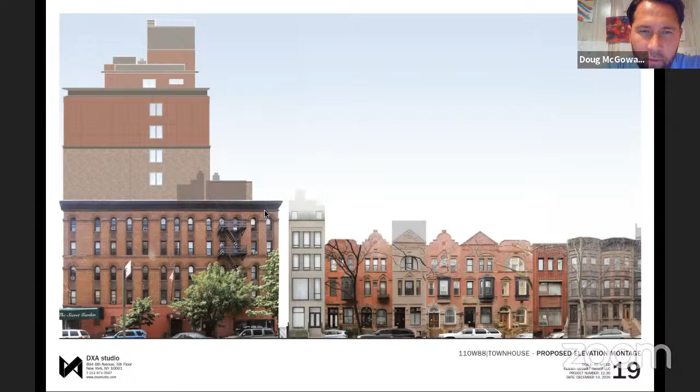Related to uniformity, one other question: when I look at the townhouses to your right, I notice quite a bit of arch and roundedness to a number of the designs, and I'm wondering if they're applied to the design being presented, or where they are being applied to the proposal.

No, we did not go with the arches in this contemporary vernacular we're using. The arch is a little bit foreign, and there's ample precedent among these buildings where sections are entirely rectilinear. So the fact that it is rectilinear and doesn't utilize the arch plays to the diversity. It's a balance of things that are the same, a balance of things that are quite different, so you're absolutely right.

The arches, even the one here that has no arches per se, still has this eyebrow above the windows. So every one of them does have that feature, but we felt that wasn't really in line with the vernacular we were trying to establish as a reflection of contemporary building technology and aesthetics.

Can I ask a question about the roof, the top floor? I'm a little confused from this picture, I know it's a little foggy there. Is that one very tall floor, and does it slope back, or is it recessed? It's set back, right here.

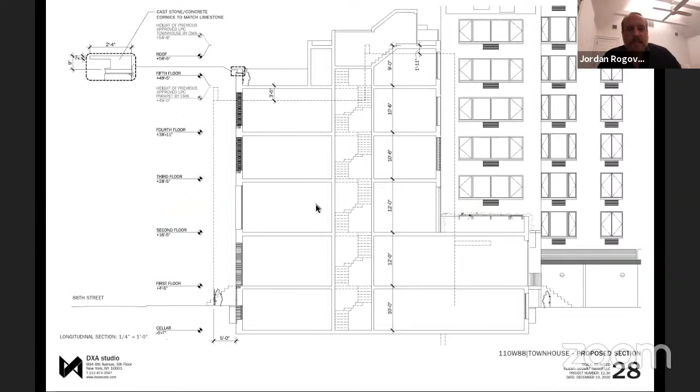If we go back to the rendering, the visibility studies here - that rendering is misleading. It indicates that's visible at full height match, but it's actually set back. The elevation has no horizon line, it's essentially flat on every floor, so you never experience the building that way. What you see on my screen right now is the most visible that 5th floor will be from up and down West 88th.

That pink area here, that's what would be visible. It looks different from the front facade. Those elevations look flat, we get that all the time. It makes the rooftop additions look like just another story on the building, and makes them look scary, but it's really not. We like to avoid those drawings when we can. No, they're always somewhat misleading.

Other thoughts, Mark? Well, I think Paige had her hand up first, but Paige? Yeah, sorry, I've been gone and I'm back. And Peter has his hand up too. Yeah, okay, and I have.

I'd like to comment that the one thing I think needs some work is the 5th floor. I think, different from the townhouses to the west, it's one floor higher, and it acts as a go-between between the townhouses and the tenement building to the east. But I think there's a missed opportunity here to do something different at the top floor, if no other way than doing something with the brickwork.

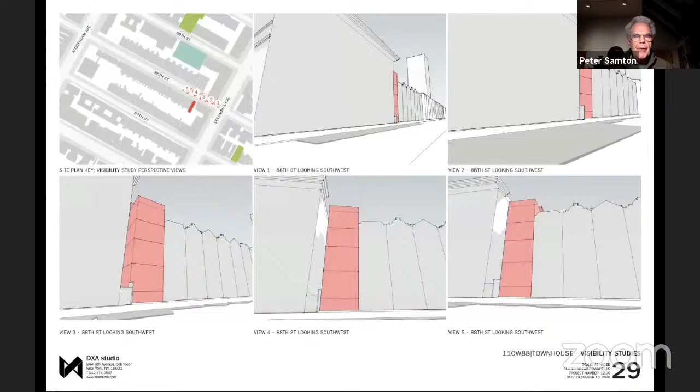Between the reddish and brown other buildings. But it's the top floor that I think needs work. It could be done fairly easily with the brickwork, a different kind of brickwork or something special up there to recognize that it's a transition. It's both a floor and a transition. It's a transition to the top, and a transition between the 3- and 4-story buildings from the west to the 5-story building to the east.

So I think there's an opportunity without a major change to do something different at the top floor. I think that's a very fair comment.

What's not visible in any of the renderings here is that there actually is a material shift. We know that one of the established methods of building in this neighborhood, and a lot of neighborhoods around Manhattan, is that you do a primary material on the street face, and wrap it around, say, 12 to 18 inches, then go to a lesser grade material. So we're planning to do that here, where the limestone wraps that 18 inches, and then we switch to a brick that is the same kind of buff or sandy color of the limestone.

So we are going to have a material shift that happens there that I think will speak to what you're talking about, so you don't have this monolithic presence. I think you're going to have a much different texture.

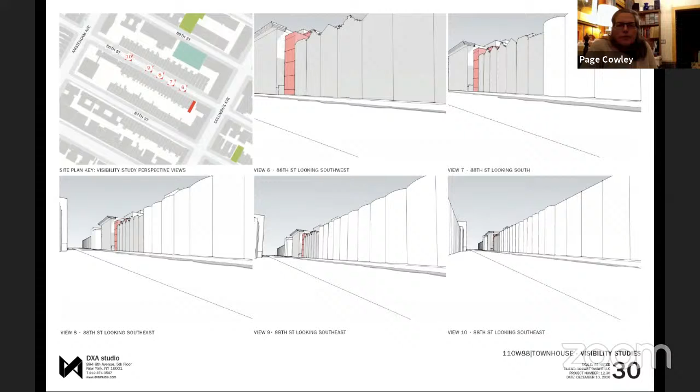For the record, I didn't vote for this last time. And for all the changes that you made, I now had a chance to look at the previous design and this one, and I'm going to start off with two questions, then give you my reaction. First question: against the tenement at 100 West 88th Street, is the return wall that faces that tenement building faced in the same material as the facade, or is it a lesser grade material? I know you don't see it unless you're walking from the east to the west, but the party wall where the gap is between the two buildings - what is that east wall made of?

Sorry, your voice trailed off. Oh, I'm sorry. After 18 inches, to what material? Limestone back 18 inches, then brick the remainder of the west and east elevations.

Okay, and then the other question is, could you pull up the plan on the parlor floor? Sure. And the reason why I wanted to look at that for the entrance, I think it's the second one.

One of the problems with the height of this building is the fact that you've chosen not to put a basement level in, but start with a cellar and then grow the building with the typical parlor floor height, and then you keep repeating the same height. The thing that disturbs me - to be honest, when I looked at this before, it didn't dawn on me - but because you use so much of the center of the building for storage, elevator, and stairwell, when you actually enter that room, that great big window, which you say is going to be sun-filled, heads up, it's not. It faces north, it's cold, and it's blocked by the tall building on Amsterdam.

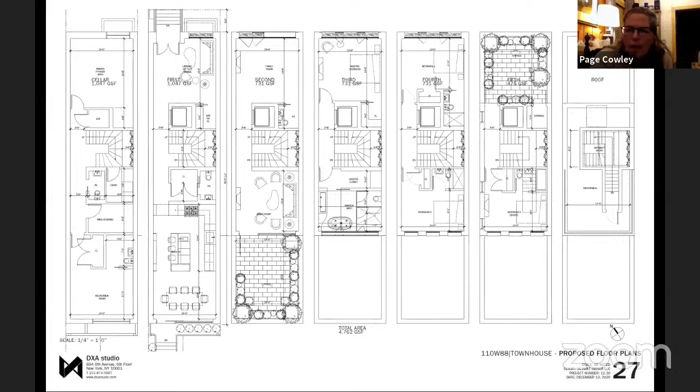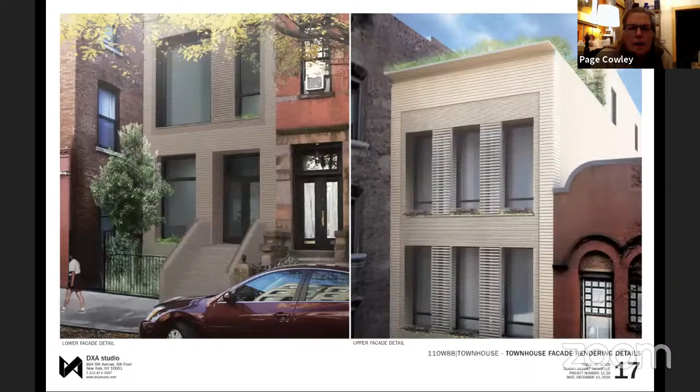So that's an observation, because I think designing the floor plans this way creates problems on the facade. And now if we could go back to the facade, there are two things that really disturb me. First of all, in my life studying historic buildings and contexts, this reminds me of an infill design in war-torn Rotterdam after the war, where they had to quickly throw up very modern buildings. And the problem here, as Peter and others, my colleagues have suggested, and Jay, is one of scale.

You could take the bay window of the building at 112 and put it in the bay, it would fit right through with your large glass opening. One just wonders the size of the people that are going to be upstairs, with a diminutive door and something that is akin to its neighbors in alignment. But I have a real problem with scale. I have a real problem.

I think rain screens are great in certain areas, and I know that's the big thing right now for sustainability, and the transition with these beautiful little bricks, but I don't think you're doing enough justice to it. I'd rather see more of your stone bricks than more of the glass windows.

And I agree with Peter. The fact that the top floor of this building has these large windows, and then you have what I would assume is about 8 feet of cornice of blank wall with a parapet, and then the setback for something even bigger at the backside.

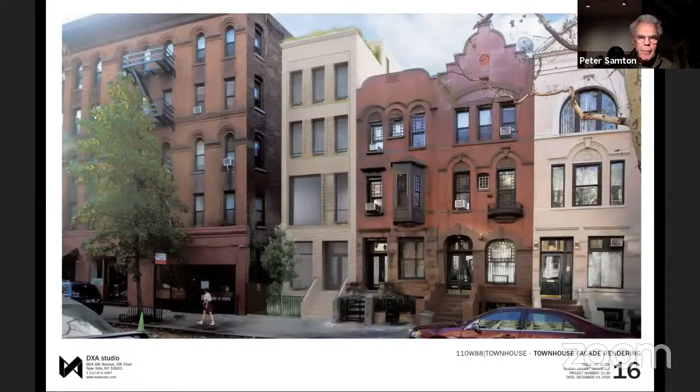And I think it's easy to do it by changing the material. That would go a long way, by my thinking. Okay, thank you, Peter.

Is that everything? Anybody else? I guess what I find disturbing about it most is that big window on the second floor for the family room. And I do agree with Page that the rooms behind are going to just feel dwarfed by the window on the parlor floor and on the family room window. The rest of it, I'm not loving, but I could probably go along with some of it.

All right, so where are we at? Somebody should make a resolution. I think we should disapprove. Okay, Susan? Great. Do you want to say anything more about that or just carry on, Kay?

We had such flowery language 6 or 7 years ago, but no reason why you can't append the one from 7 years ago to what you're doing now. I sense that we would want to do that. All right, do people understand where we're at? Yes, the motion is to disapprove, for the reasons that you've already articulated.

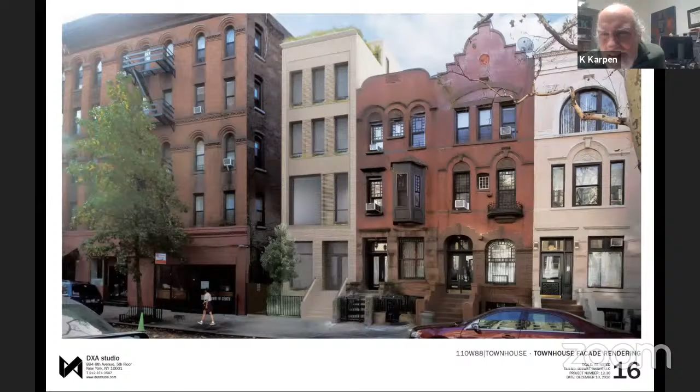Okay, all right, so that's 7 to 0 to 0 to 0. Okay, and Page, agree? Okay, Doug? I agree, and I with regret, but I do agree, yes. Mark? I vote yes.

Okay, is there a date with landmarks? Yes, January 19th. Okay, so you'll have a full board. This will be presented at full board on January 5th. You're welcome to come and offer comments at that time, but Kay and Michelle will be the ones to present the resolution. But of course, you're welcome to speak.

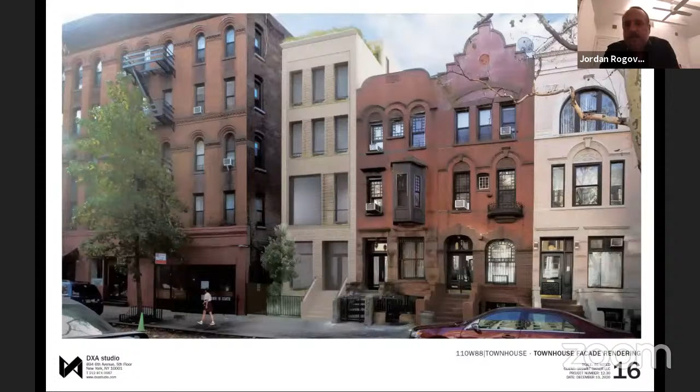I'm glad. I was hoping for something better, and I'm sad that they didn't modify it. If just some movement would have given me reassurance, like Peter said, the color or the material or something. I just don't see it on our street.

I don't live on your street and I don't see it either. Page, you crashed nothing. It's always a better party when you're here. Oh, God, I better start behaving, right? No, don't do that. We'll wonder who you are, being at home with my dog all the time. You start behaving, we're going to have to send you to Community Board 8. Oh, God, yikes, I have to go guys.